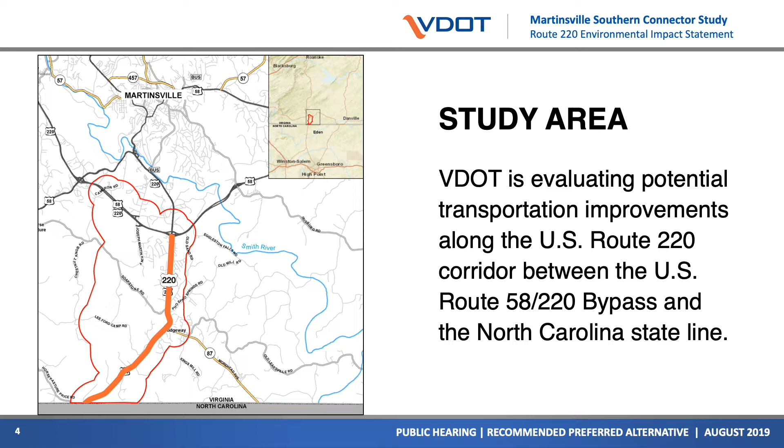The Martinsville Southern Connector Study evaluates transportation improvements on U.S. Route 220 between the junction of U.S. Route 58, U.S. Route 220 Bypass, and the North Carolina state line. The study area is large enough to encompass potential improvements, but does not imply that impacts would occur within the entire study area.

To recap the progress of the study process, the FHWA published a notice of intent to prepare an EIS in the Federal Register on February 22, 2018. A public scoping meeting was held on May 18, 2018 at Magna Vista High School to introduce the study and gather public comments on the issues within and surrounding the U.S. Route 220 corridor.

An online survey conducted in fall 2018 asked participants questions about the U.S. Route 220 corridor, including which portion of the corridor do you typically travel, and what are your primary reasons for traveling on the U.S. Route 220 corridor. The survey also asked participants to give feedback on how to improve travel on this corridor. The comments received from the 775 responses helped shape the purpose and need for the study.

The purpose and need sets the goal for the study that are met by different alignment options or alternatives. After the purpose and need was identified, 11 alignment options were developed and presented to the public at a citizen information meeting on January 23, 2019 at Drewry Mason Elementary School. At the same time, another survey on these alignment options was conducted and 81 responses were received.

The Corps of Engineers and the U.S. Environmental Protection Agency, EPA, were involved in all these steps and agreed with the purpose and need and alternatives to be retained. Agency agreement was informed by public input and monthly meetings with federal, state, regional, and local agencies. Following concurrence from the federal agencies, VDOT conducted analysis of engineering, traffic, impacts, and costs to refine the alignment options to a range of alternatives to be evaluated in greater detail in the EIS.

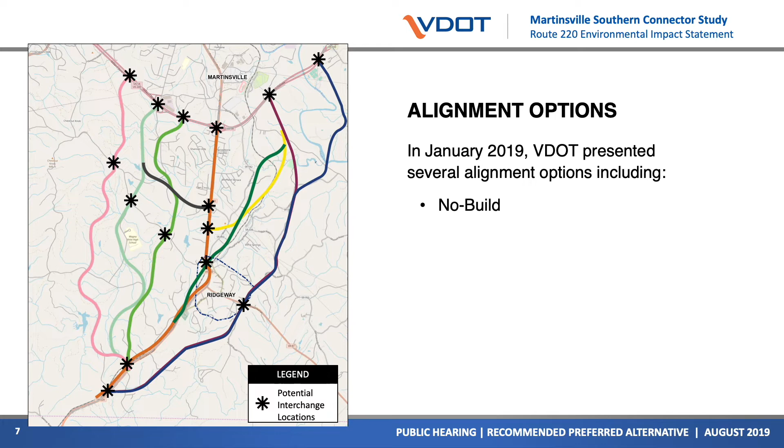11 alignment options were developed and evaluated to determine whether they met the purpose and need. This included Alignment Option 1, the no-build alternative, which is required for NEPA studies like this EIS. Alignment Option 2, Transportation System Management, Travel Demand Management Improvements. Alignment Option 3, Reconstruct Existing U.S. Route 220. Alignment Options 4A through 4D, Western Alignment Options. Alignment Options 5A through 5D, Eastern Alignment Options.

VDOT evaluated the alignment options using a 300-foot inventory corridor with potential interchanges represented by asterisks on this map. All alternatives assume a full access controlled facility with access connections at interchanges to document a worst-case scenario for impacts and costs. The interchanges along each corridor are designed to preserve all existing movements. If and when a preferred alternative advances to more detailed design phases, final decisions could be made about the level of access control that would be applied to the facility and how interchanges would be configured.

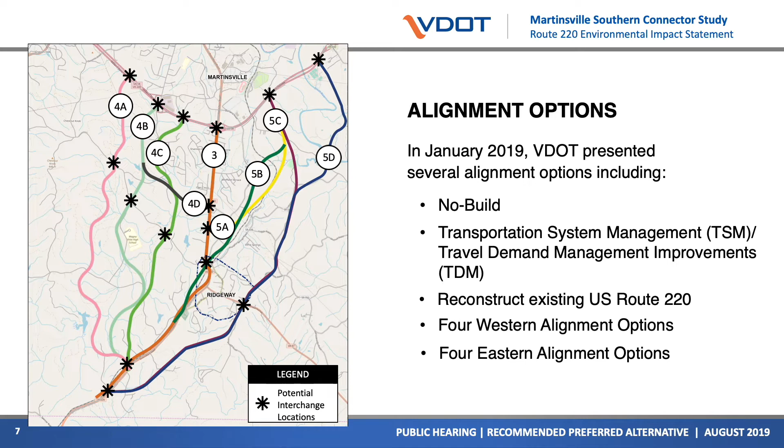Transportation system management and travel demand management improvements are designed to maximize the efficiency of the existing transportation system through strategies such as coordinated traffic signal timing, promoting carpooling, and staggered work shifts. This option was determined not to meet the needs for the study as a standalone option. However, it could be implemented in the future as part of a preferred alternative or standalone projects.

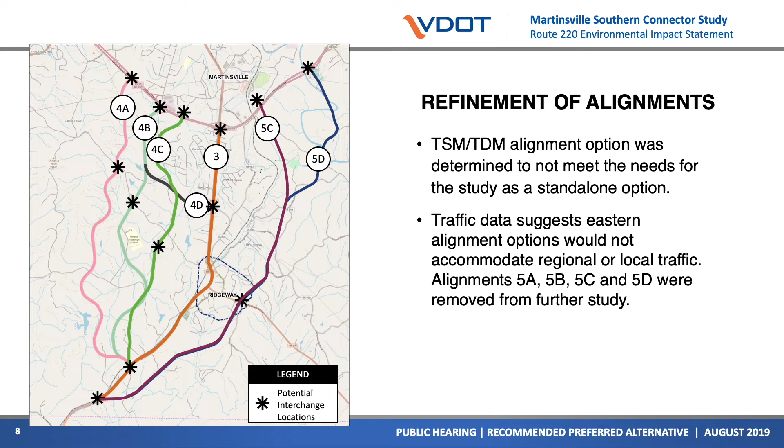Traffic data developed for the study indicates that most northbound traffic along Route 220 traveling through the study area eventually travels in a northwesterly direction. Therefore, the eastern alignments were found to not meet the need to accommodate regional traffic. By not accommodating regional traffic, the need to accommodate local traffic would also not be met. As a result, the eastern alignment options were not retained for analysis or consideration as a preferred alternative.

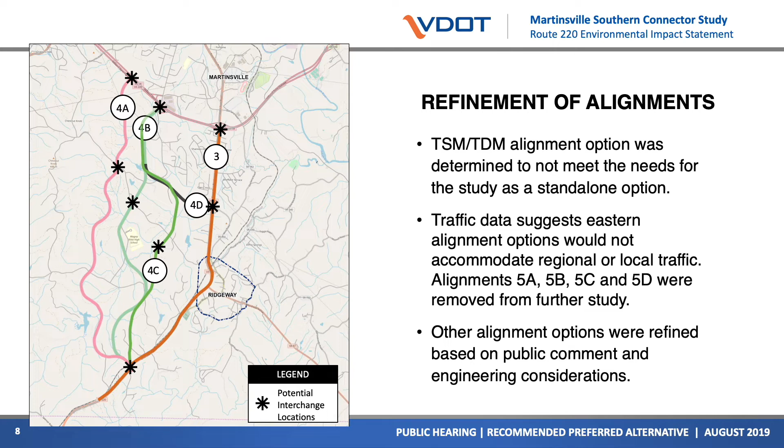Other alignment options were refined based on public comment and engineering considerations. The western alignments, the western spur, and the option to reconstruct existing Route 220 were determined to meet the purpose and need of the study.

After initial evaluation of the alignment options and public comment, the following alternatives were retained for study: Alignment Option 1, which is the no-build alternative and required by NEPA; Alignment Option 4A, now Alternative A; Alignment Option 4B, now Alternative B; Alignment Option 4C, now Alternative C; Alignment Option 4D, now Alternative D; and Alignment Option 3, now Alternative E.

Once the alternatives were retained, VDOT was able to advance with greater consideration as to how each alternative could reasonably connect to existing roads. Therefore, Alternatives A, B, and C were refined to swing to the east and then cross over existing Route 220 to follow west of the existing route. These are worst-case interchange scenarios that would be refined if the project advances to detailed design.

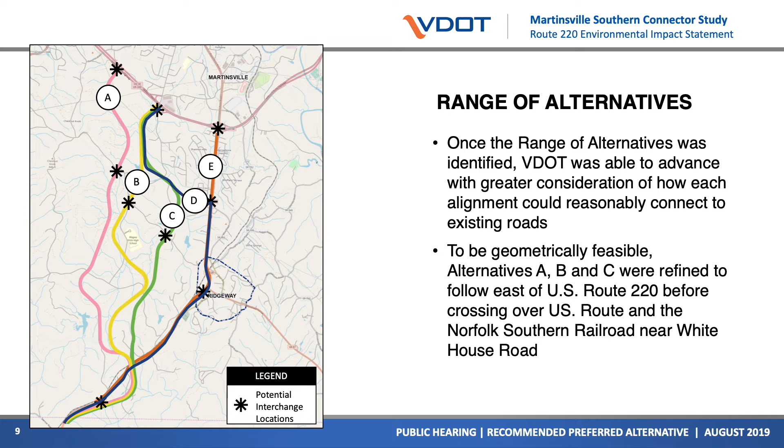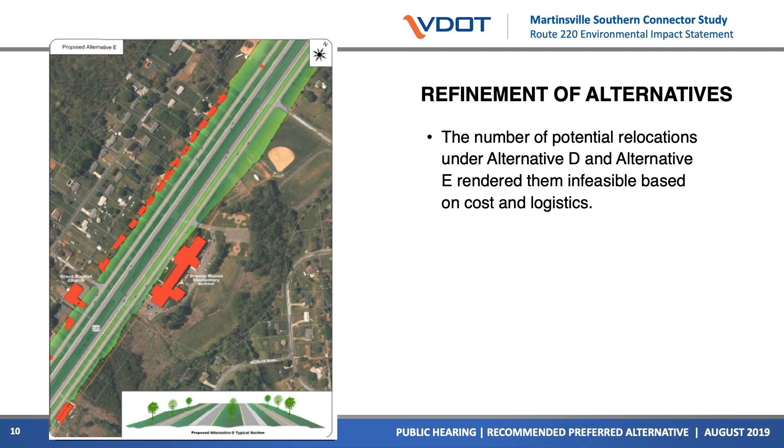Based on preliminary right-of-way information, the high number of estimated property impacts estimated for Alternative D and Alternative E made both infeasible to consider as a recommended preferred alternative. The preliminary data collected on these two alternatives will be documented in some of the reports associated with the study, but they are not under further consideration.

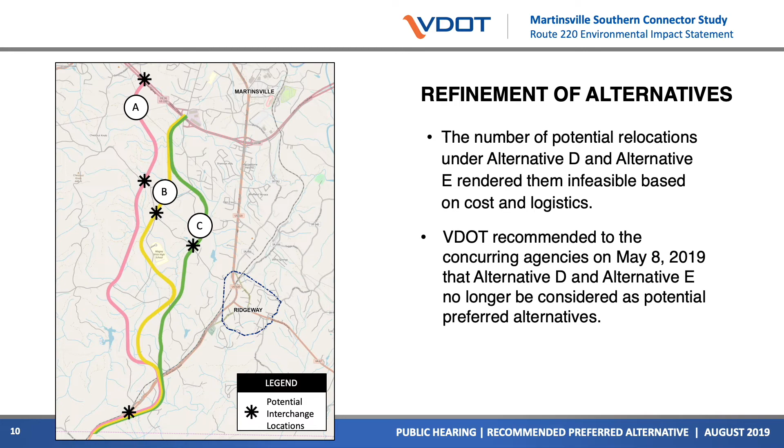The no-build alternative illustrates the existing conditions with all other current planned transportation improvements and serves as a baseline for comparison with the build alternatives.

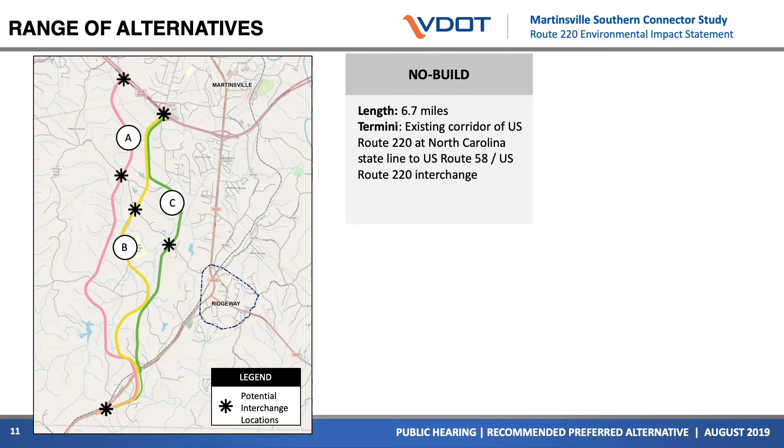Alternative A starts at the existing U.S. Route 220 at the North Carolina state line, running to the east and then crossing over U.S. Route 220 and heading northwest to connect to U.S. Route 58 at a new interchange located one mile west of the existing Joseph Martin Highway interchange.

Alternative B starts at the existing U.S. Route 220 at the North Carolina state line, running to the east and then crossing over U.S. Route 220 and heading northwest to connect to U.S. Route 58 at the existing Joseph Martin Highway interchange.

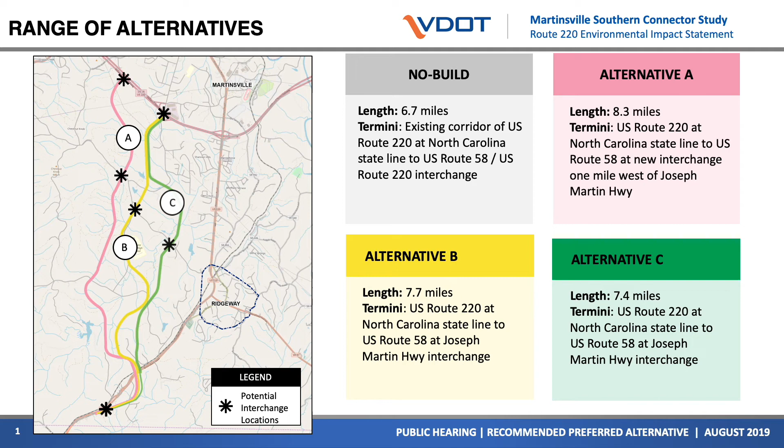Alternative C starts at the existing U.S. Route 220 at the North Carolina state line, running to the east and then crossing over U.S. Route 220 and heading northwest to connect to U.S. Route 58 at the existing Joseph Martin Highway interchange.

VDOT collected data along a 400-foot wide corridor for each alternative. Estimated impacts and costs for each alternative are based on illustrative planning level designs, or limits of disturbance, that would be refined if an alternative advances to detailed design. Through the study process, VDOT has evaluated the potential impacts within the limits of disturbance for the range of alternatives, including potential impacts to private property, wetlands, streams, and forests.

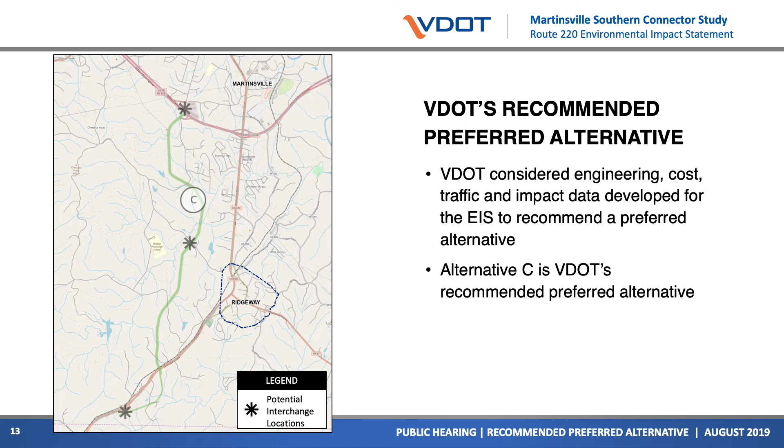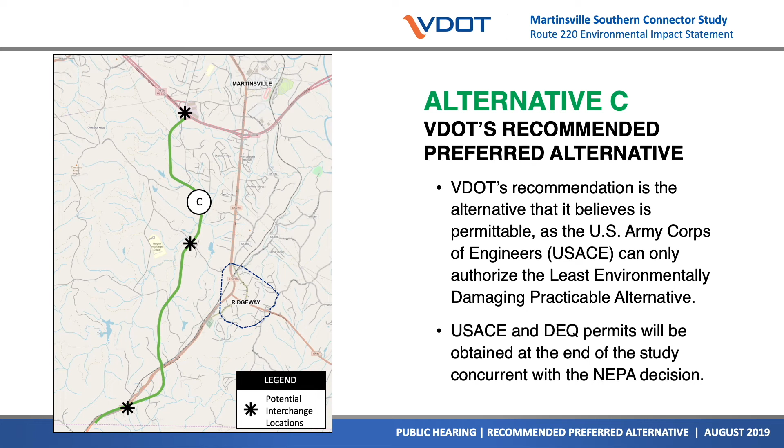VDOT's recommended preferred alternative is Alternative C. VDOT considered the extent to which each alternative meets the purpose and need while balancing cost and impacts. VDOT's recommendation is the alternative that it believes is permittable. The Corps of Engineers can only authorize the least environmentally damaging practicable alternative through its permits process, meaning the alternative must result in the least impact to aquatic resources while retaining feasibility. Therefore, the estimated wetland and stream impacts presented for each alternative play a key role in informing the identification of the preferred alternative.

After this hearing, VDOT will finalize the study documentation and the FHWA will publish the draft EIS. Sign up on the study website at virginiadot.org/Martinsville Connector to receive notifications on the issuance of the draft EIS and future public hearings. Following the review of the draft EIS, VDOT and the FHWA will respond to substantive comments received from the public and the agencies involved in the study, refine any necessary analysis, and document these efforts in a final EIS. Following the issuance of the final EIS, VDOT will request a record of decision from the FHWA and permits from the Corps of Engineers and the DEQ. These documents will indicate the study phase is complete.